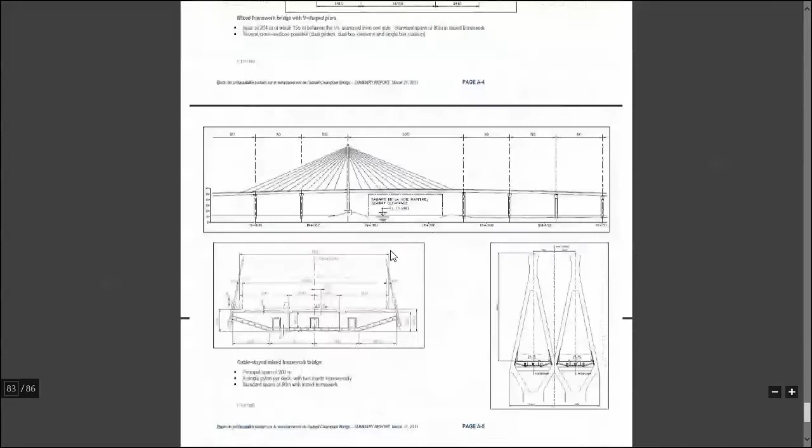Open Allplan. I'm interested in what page it was, the one with the cables. It's page 83. Okay, so let's close this.

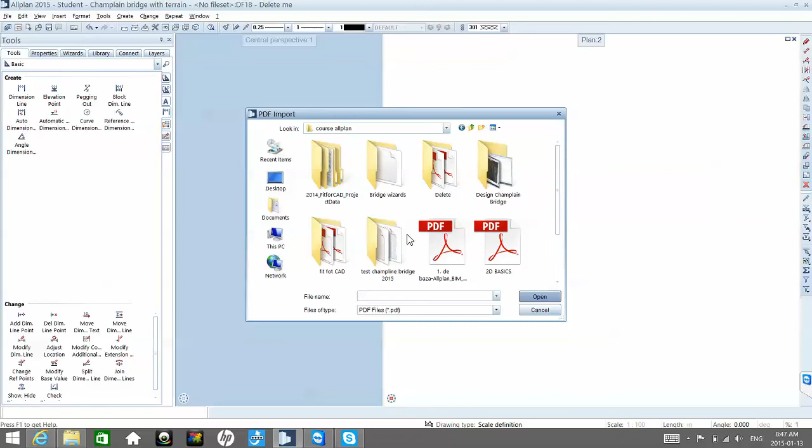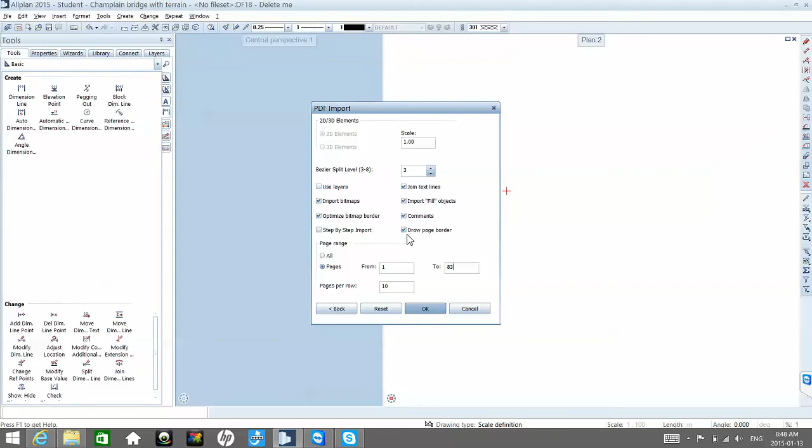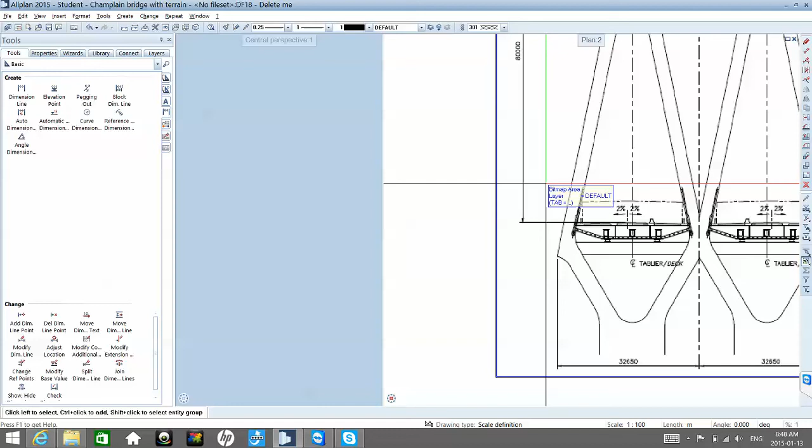Okay, so we'll draw it first. Yes, we need to draw it. Let's try with polyline. We'll go with straight elements and then we will unite them. So I'll go with this line and now with this line. And in between them, I will use this fillet option.

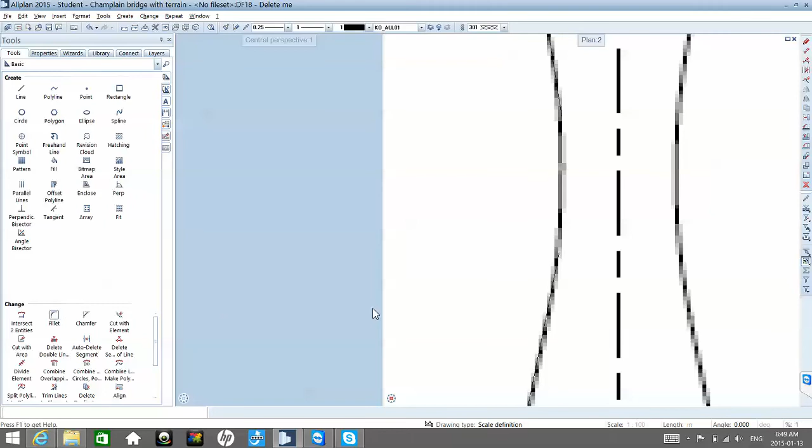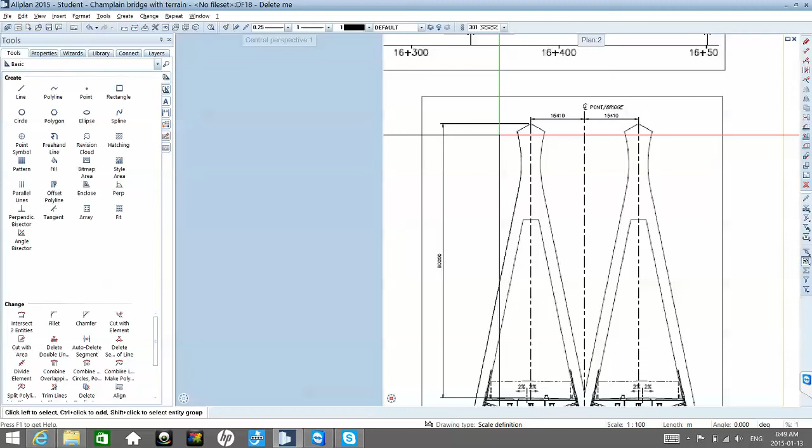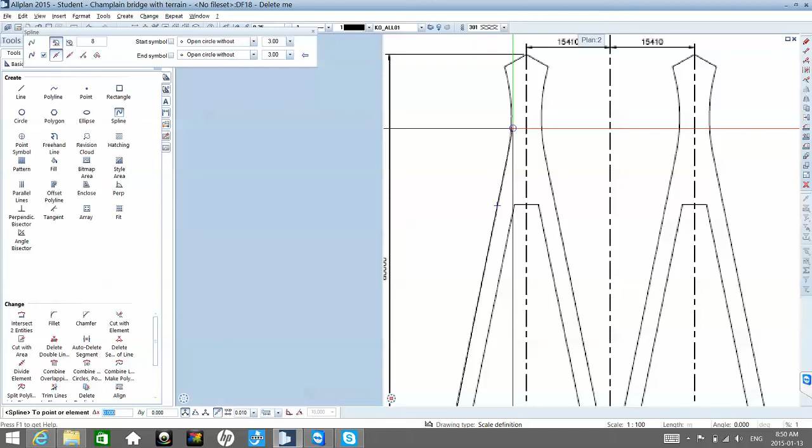No, yes, you can use spline. Yes, you will use spline, you're right. Well, the approximation is not that good.

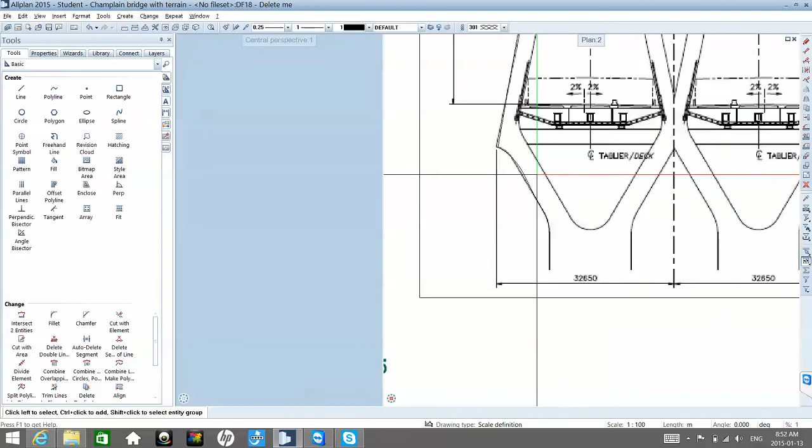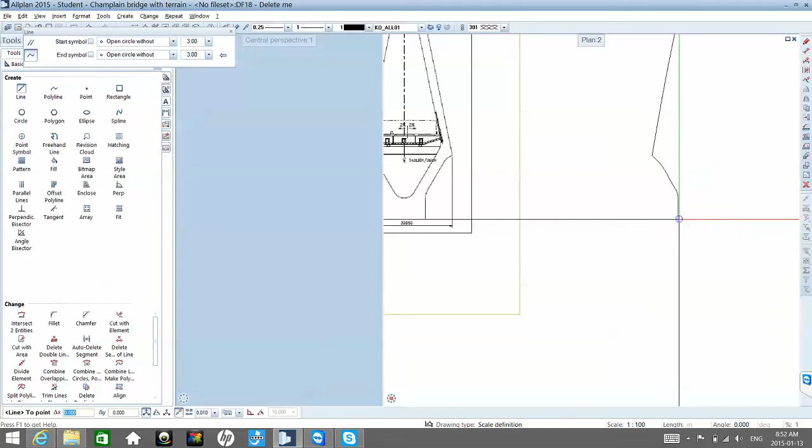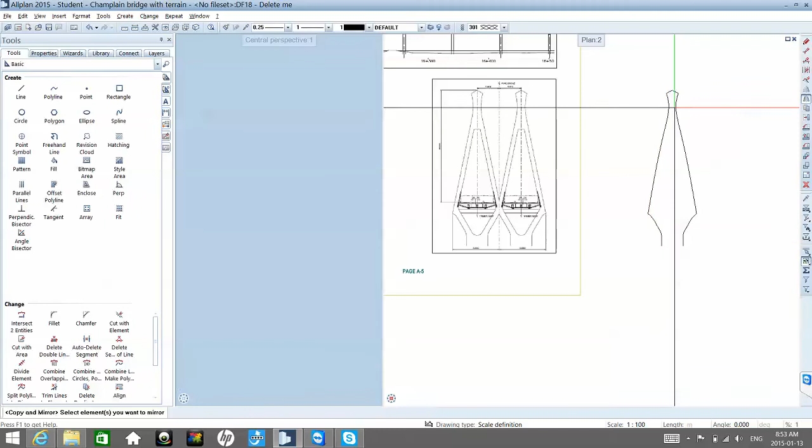Okay. Now we'll do an offset to make things easier. Well, half of it.

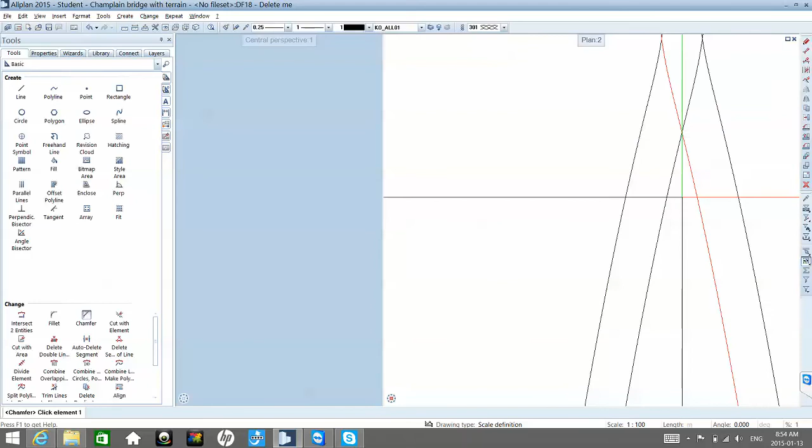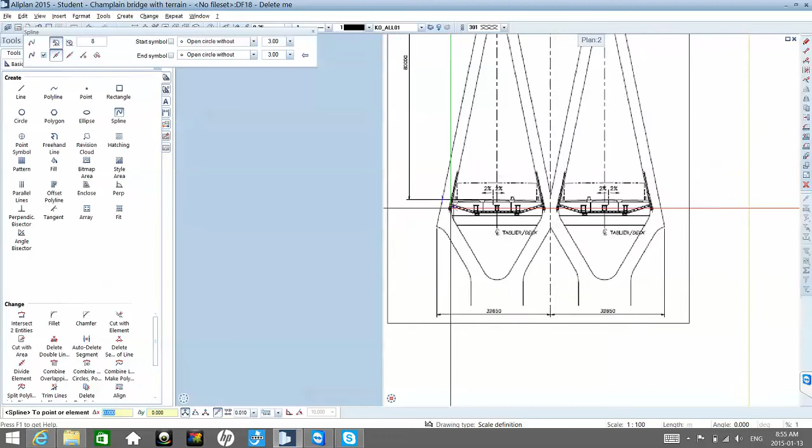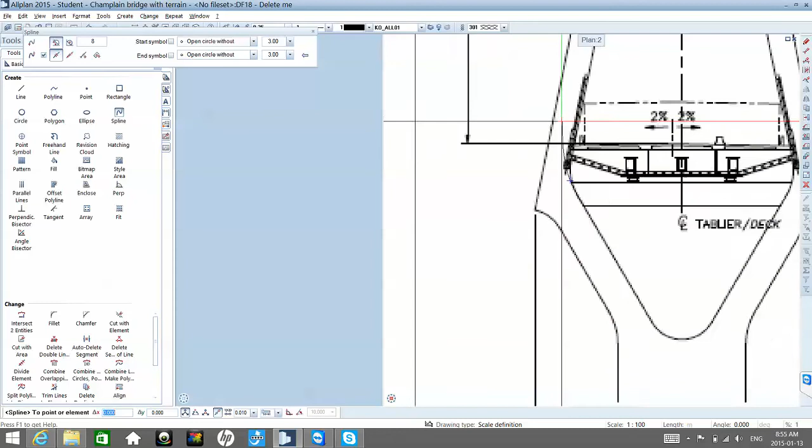Okay, we'll draw the inner as well. Offset didn't help. It's circular. Or... I don't know.

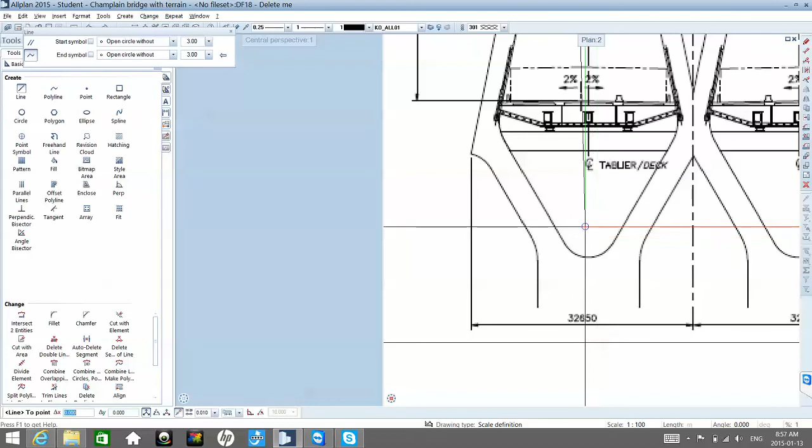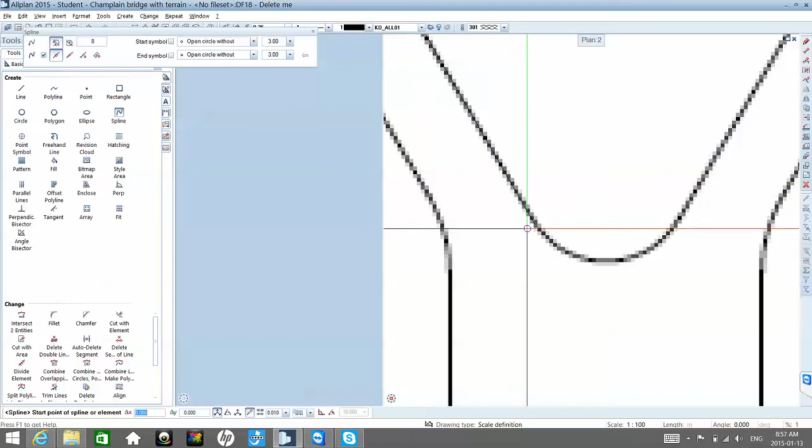Yes, yes, just half of it. No, I wanted to make two straight lines and do chamfer between them, but it's okay like this as well.

Yeah, yeah. We'll only need to move it outside and then pick up the symmetry line.

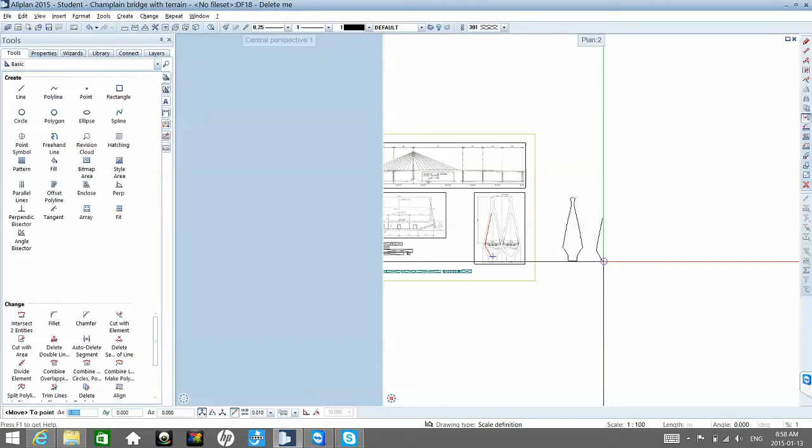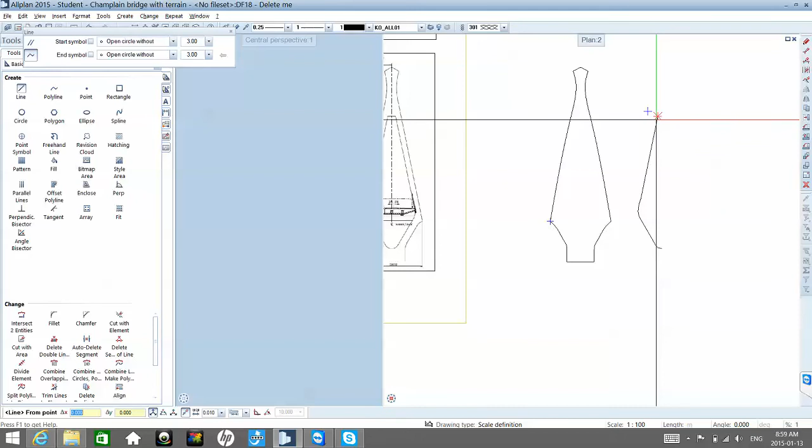We'll take it. Because I want to do a mirror of it and then I'll move it. I'll move it in between them. So I want to add some extra elements, which would be this line.

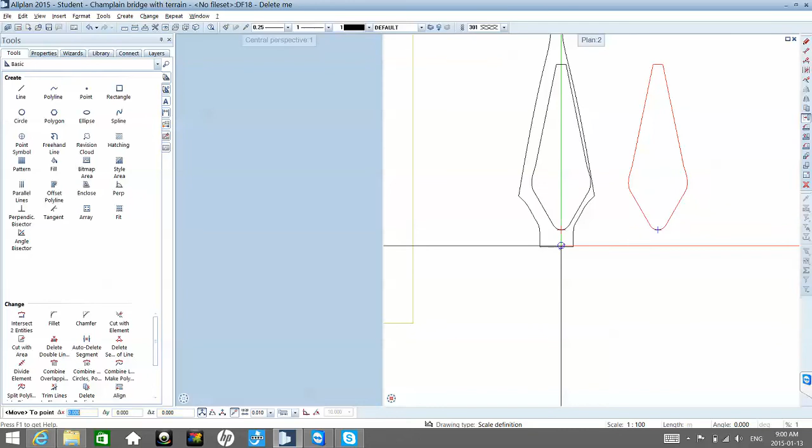And now we'll convert it to a 3D lines and then 3D surfaces and lastly 3D shape.

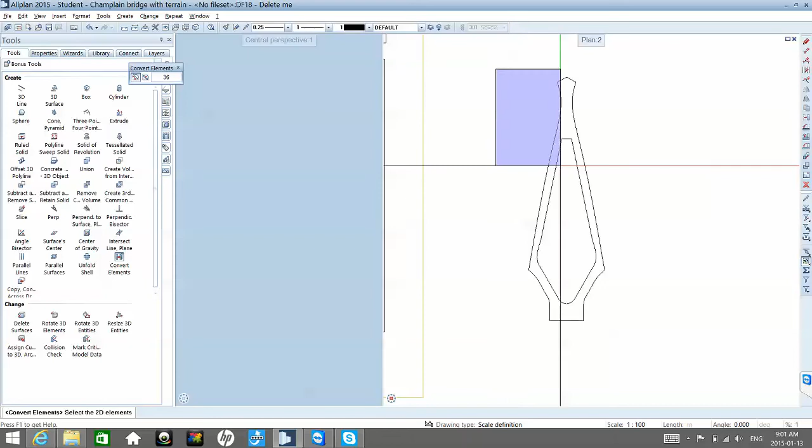Okay, and now we'll make it 1 meter thick.

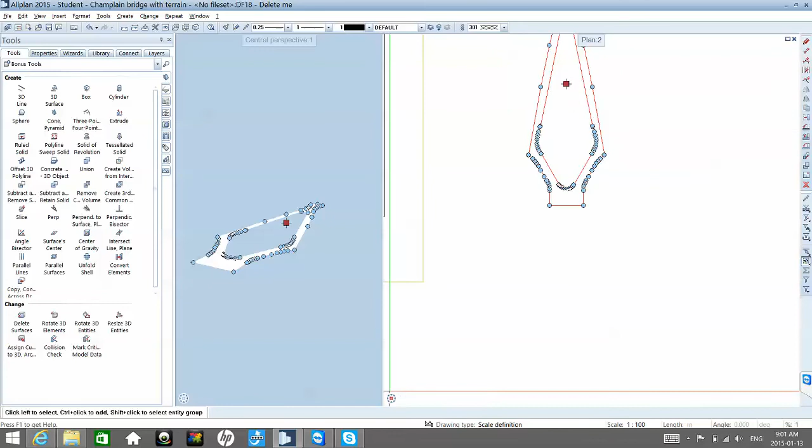Now we'll extrude. Then we'll raise it freely in 3D.

This is the element, and now we'll do some cross section for the bridge, maybe just to show you how we would create the cable. So I'm going to do a very simple shape only of the outer element.

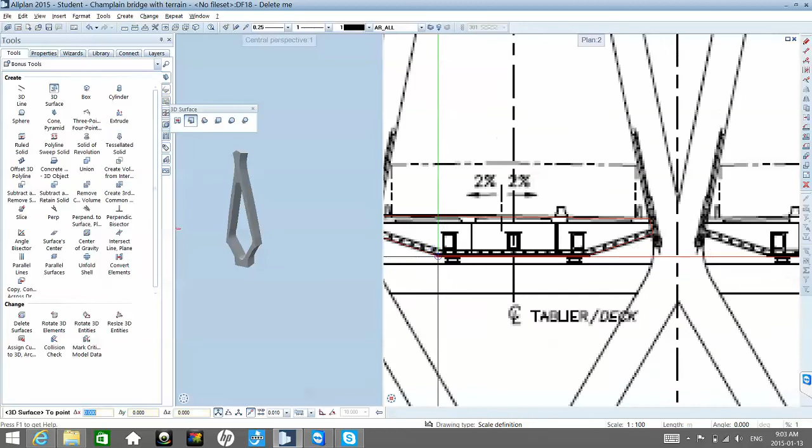Okay, and this shape we will copy it.

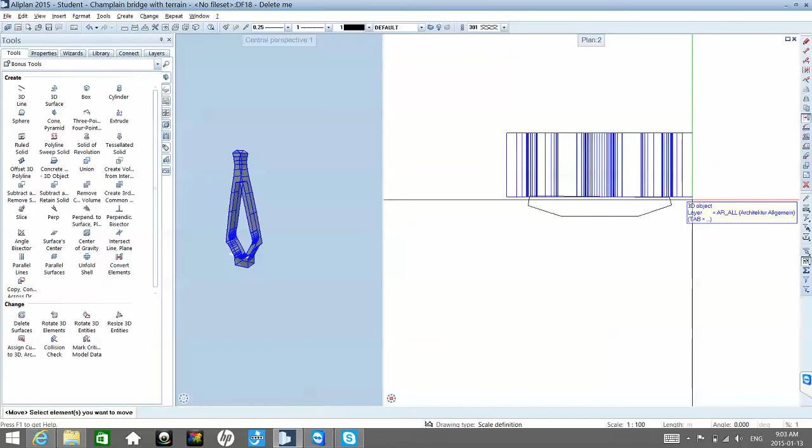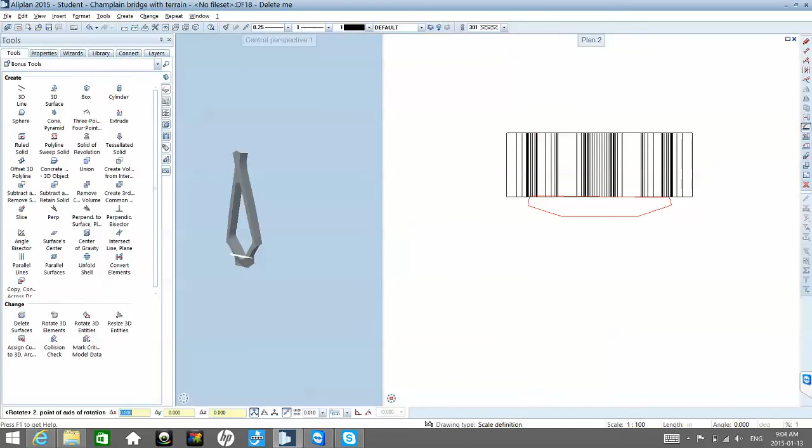Okay, I just want to, no, I'll show you. I want to show you again that function where if we have a constant cross section, we can just place our shape along a line, because extrusion only works perpendicular to the surface, while the other works on any shape.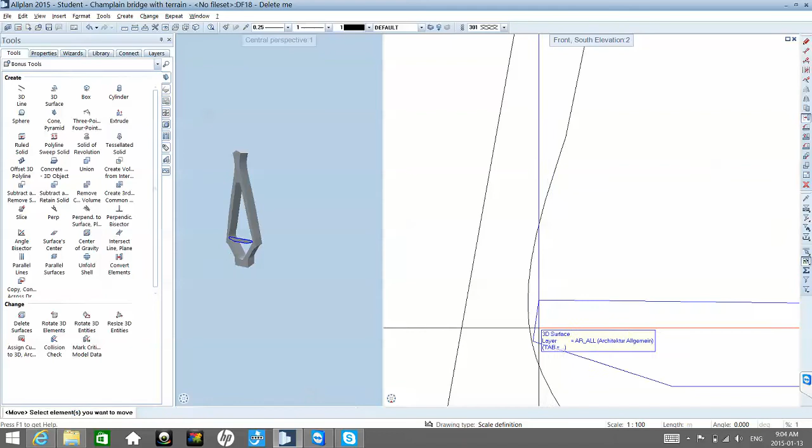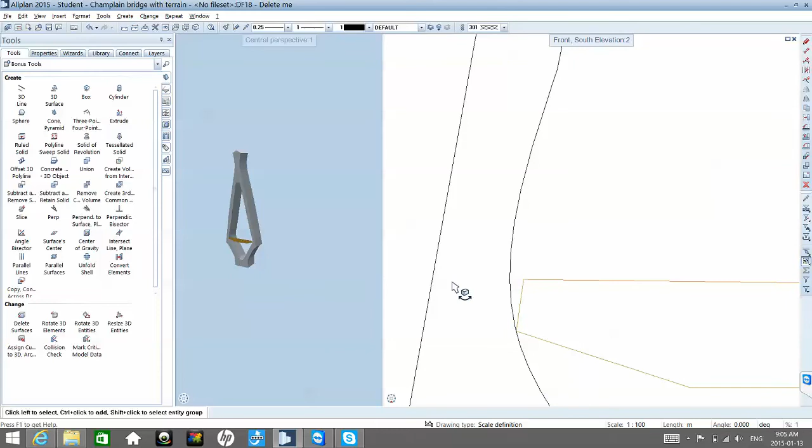Okay. Actually, here. Okay. I can also change colors just to make it more nice. And we can draw that line.

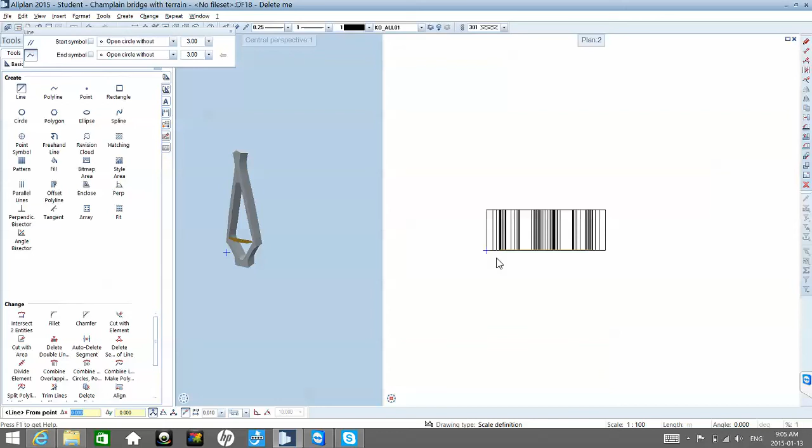For instance, we can start like this. Okay, maybe make it like this. And then we can use this fillet function to make it more realistic, the turning.

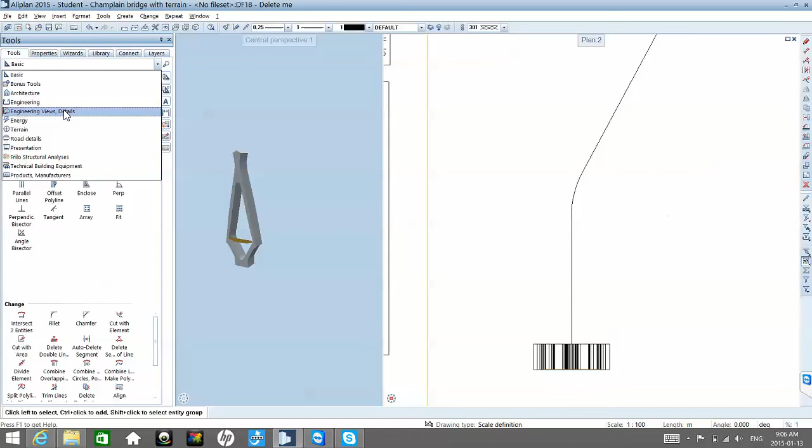Okay, and now if we convert this to a 3D, okay, we'll just have to center it somehow to our deck section, and...

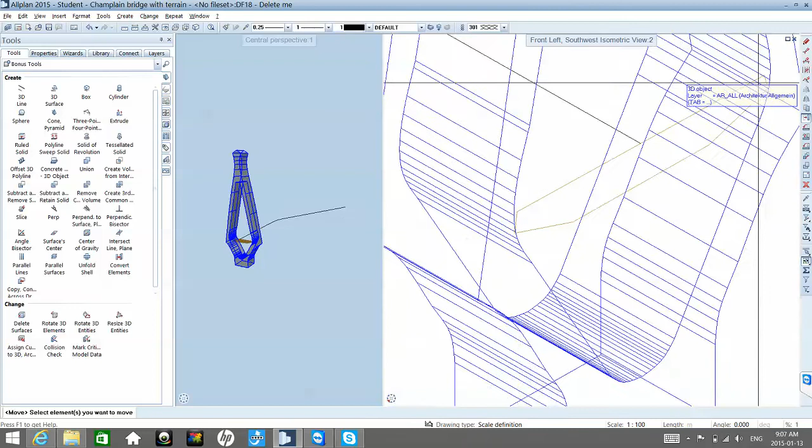Okay, and the function we're going to use is this polyline sweep solid. Select the path. This is the path, and the cross section is this one.

And in order to place cables, we would need to position some vertical elements. So we can do a box, for instance, here. I can actually start doing them in plan.

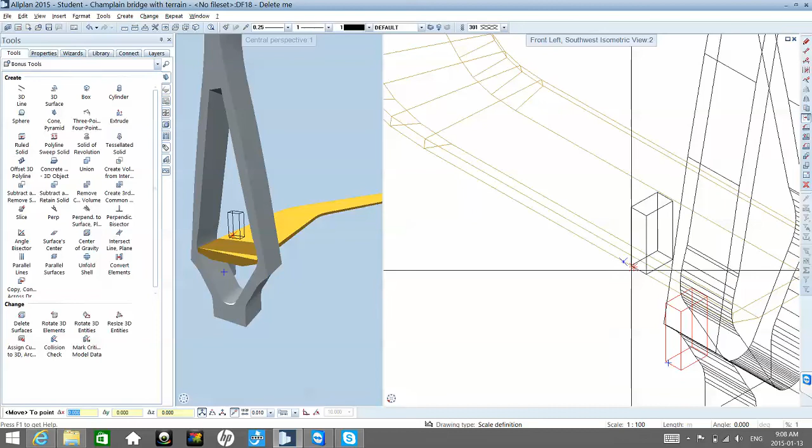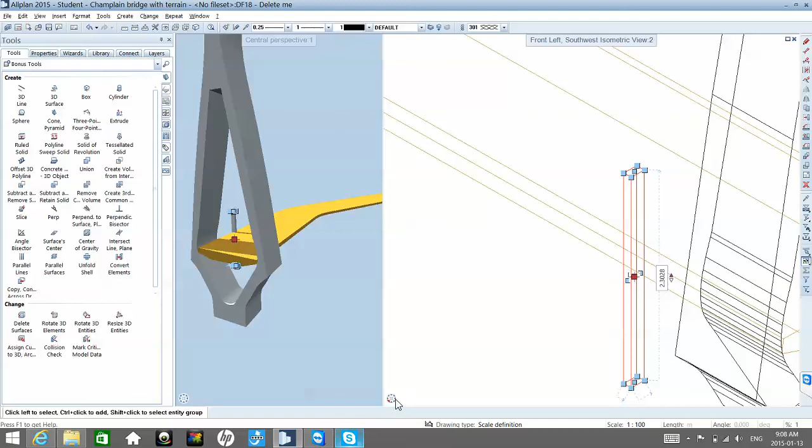Okay, and we'll place it now more precisely. Okay, it's better if you work with orthogonal positions. So I only need this in order to be able to have where to connect the cable.

So they should stay on some vertical elements that are normally attached to the deck, and they'll have a certain placing. For instance, let's do another 5 copies in this direction. This will be to position the cables.

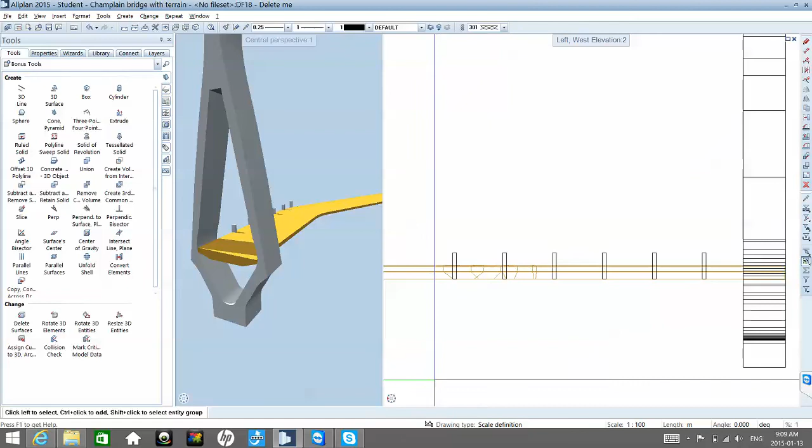So the cables will be drawn in 2D. Actually, the cables should be drawn according. But this was just an example because we didn't have that big curve. We have some curve on our bridge, but we didn't have that much curve. I only wanted to show again how we can manage if we know a cross section, especially for steel. So if we have a cross section that is constant, we don't need the bridge modeler.

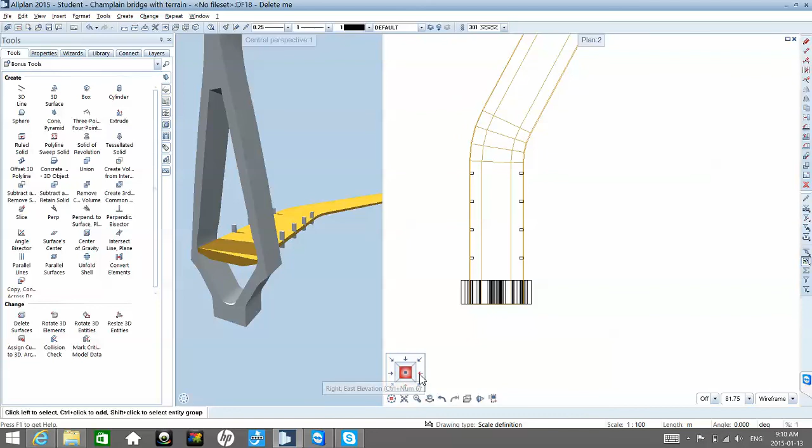We can just draw a path and the cross section. And what I'm doing now is a construction line just to show you how the cables would be modeled. Just a second, they need also to, this should be extended upwards a bit.

And the cables can be defined with this function from architecture in the roof. Actually, it's called steel timber element, and we can choose here the cross section for the cable.

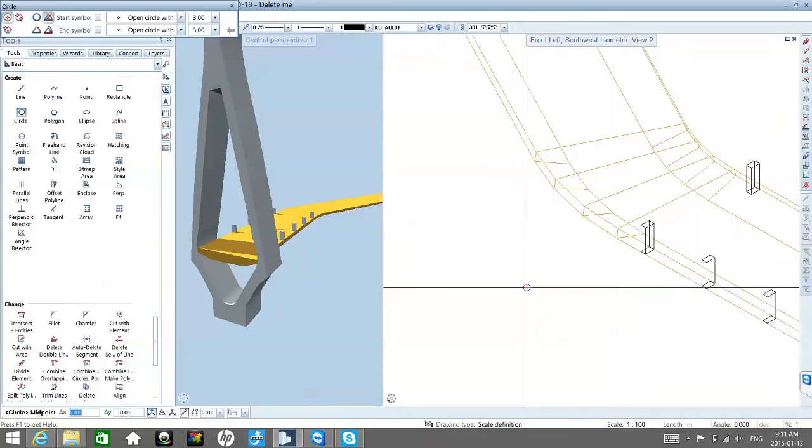By default it's a rectangular cross section. If we need a circle, we have to draw a 2D circle or any cross section. We'll draw now a circle, let's say 0.5, 1, and I'll save this to the library.

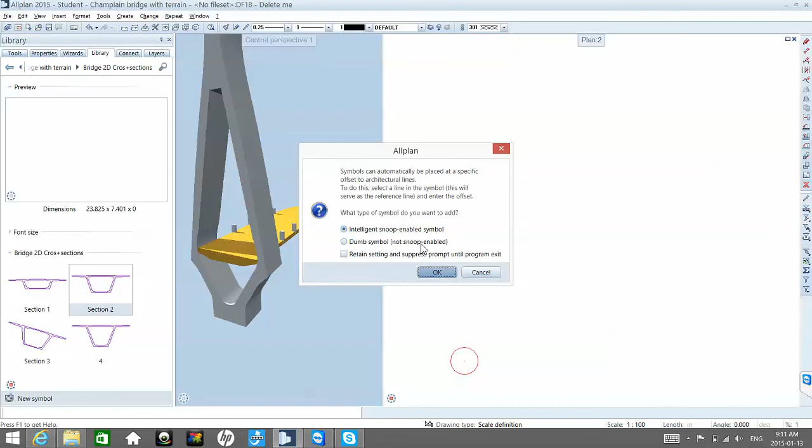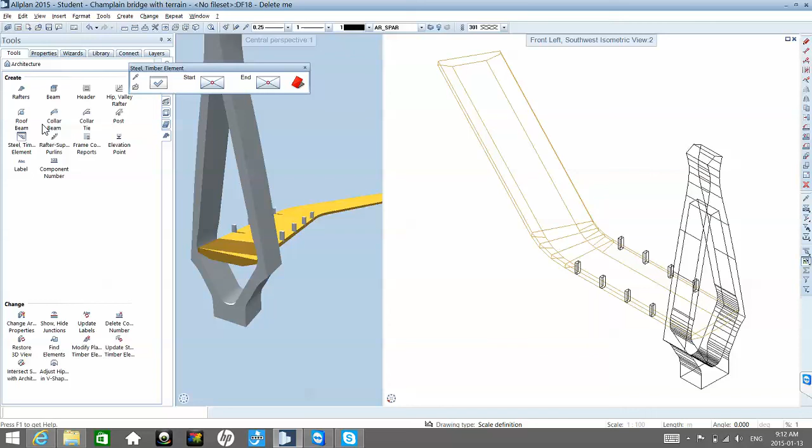Now this function can be adapted for any custom cross sections or anything we can draw in 2D, and we save in the catalog so it can be used as cross section for this architecture function called steel timber element. So this steel element actually lets us choose from the catalog a certain cross section.

So from the project we'll choose this circle, and here we can scale it, so it can take any dimension we need, as we can scale it afterwards. So we can draw any circle, and then this is how it will fit the endings. So we'll try something like this.

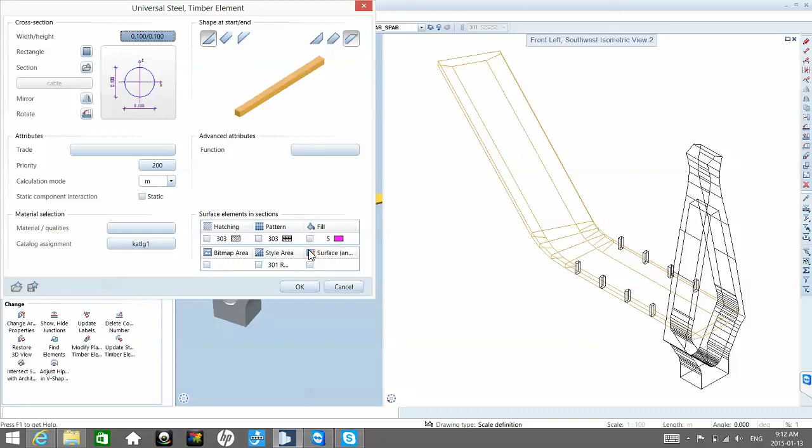And here is how it will center, if it's going to center the surfaces, or it will go on one side, midpoint like this.

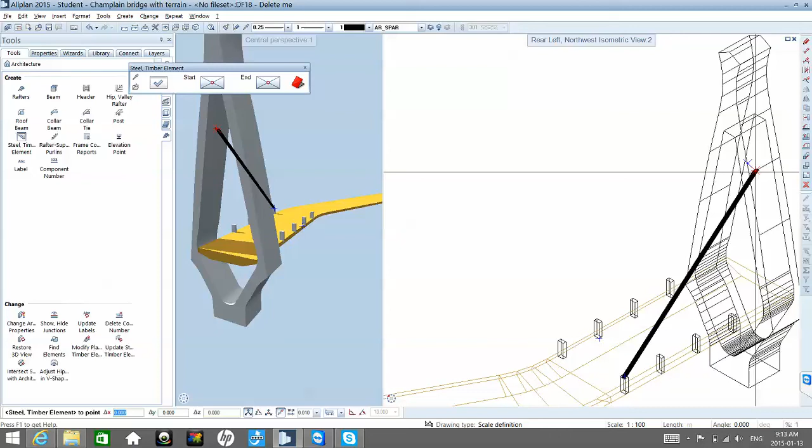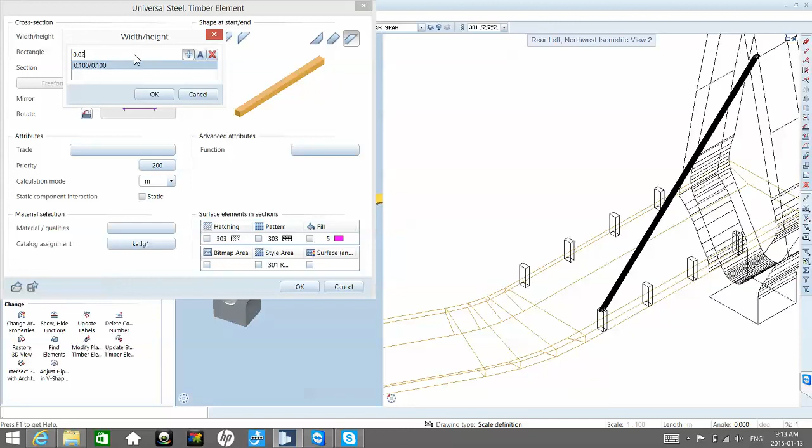We would, if we had some vertical elements or some perpendicular elements to the pile, it would be easier. Otherwise, we'll just have to fit them somehow to connect at a certain distance. So normally we would need some construction lines to know exactly where to connect this cable.

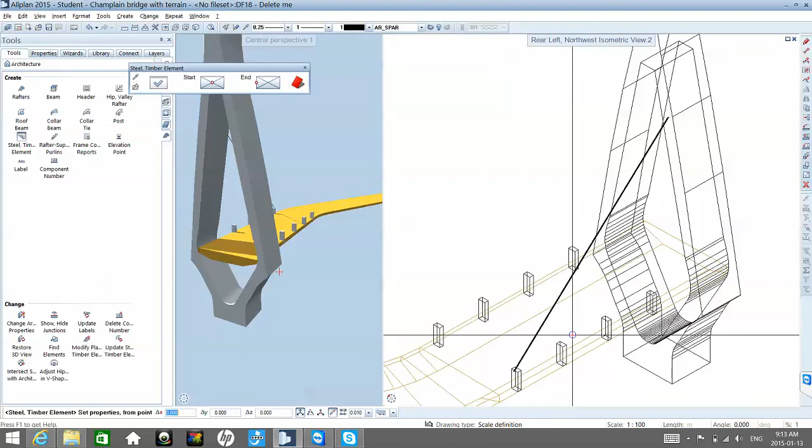As I did here, so if I want to start with the center, I just say midpoint, and this is where the cable begins. And we'll go somewhere around here. It's possible to import the properties from the previous cable.

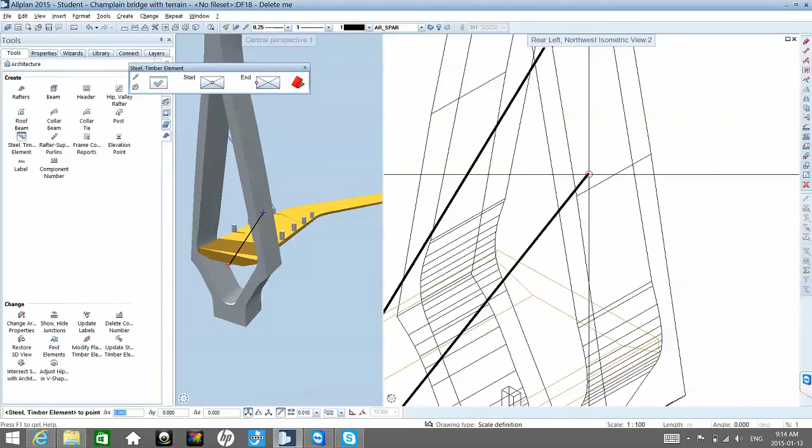So we would need some more precision, as we would need to divide the pile into some distances and create some perpendicular elements. So we just connect the diagonals between those perpendicular elements. Otherwise, we try to approximate the same as we're doing now, but we could also try using the angles we find in the front view.

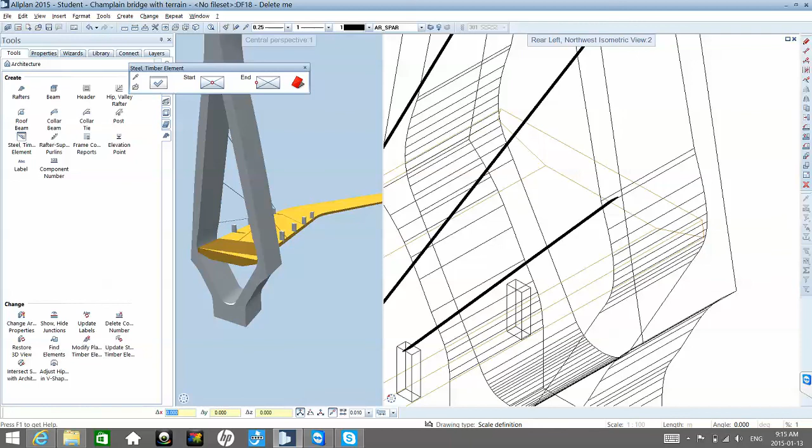So if we were like this, okay, we align the plane. We can work in any view and try to adapt the situation. Even if the ending is not okay, it should be like this rather, and it will adapt. So basically this is how we would fit it.

So if it's not drawn precisely from the beginning, we can use modification in any window we need. So I can adjust the positioning of it.

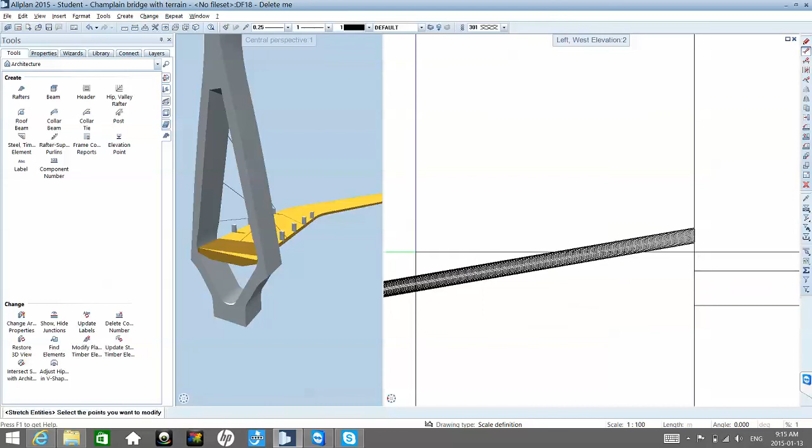We will need to somehow fit with the original drawing. So the original drawing tries to position these connection points on the deck and also on the pile, and then we just click between the two elements. Otherwise it's hard to draw something, but this is the main idea of how it can be drawn.

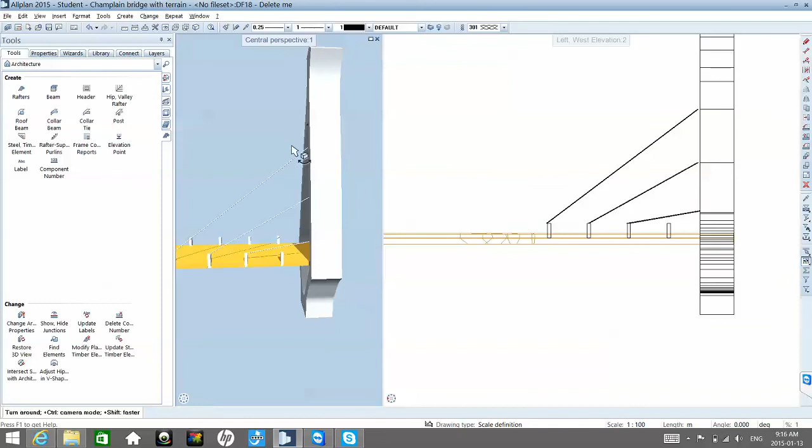Okay, I'm glad you're saying this. Well, we should look at the drawing. Exactly. Yes, that's the main idea. Okay, I'm glad to hear this. Okay, anything else for today?